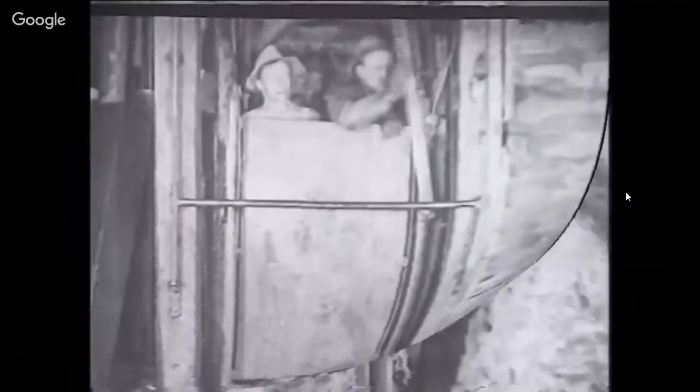Now you see these are black and whites from 1904 to 1918, mining in cobalt. The thing is, those are human beings using machines to drill and mine. Okay, so we need to make machines, or robots, that can do the mining for us. The robot that can take the machine down there and mine it for us.

Now, many people watch those Star Wars movies and were razzled and dazzled by the dark side of the Force and the supposable good side, the Jedis versus whatever we want to call them. But there's a scene where Anakin Skywalker is fighting Obi-Wan Kenobi, and they are on a planet with nothing but lava flowing around, and the machines are doing the jobs.

Okay, so we can make drones and this drone technology that can pinpoint and tell you exactly where something is. We have 3D printing machines that are 3D printing houses, 3D printing human body parts, human organs. There's no excuse for us not to make a robot machine that can go into these mines and get these things for us. We don't need child slavery, children in the Congo digging up the minerals that they're digging so we can have a piece that makes our cell phone work.

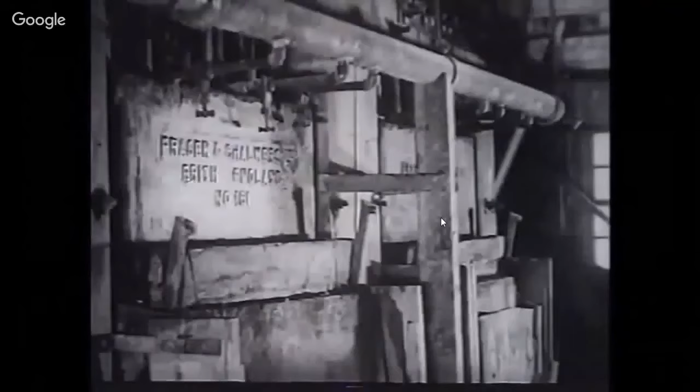The ore flows to concentrating tables, which removes coarser metallic portions, then to classifiers, and finally to the tube mills, which grind it to slime. Perfect for 3D printing.

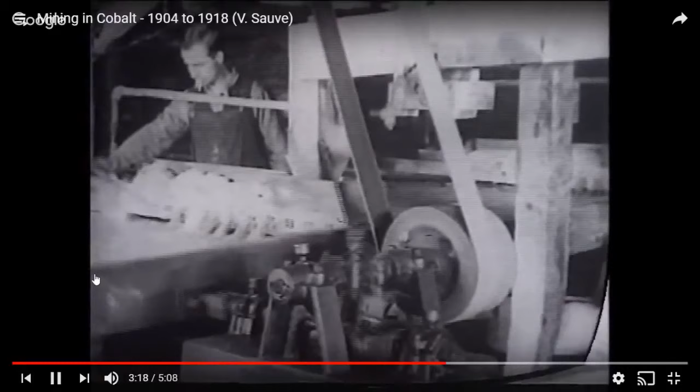No more debates, man. It's time to be men. Let's be real men. All right, let's step it up. Stop letting everybody else do stuff for us while we sit there and brag about paying for it. You could have been a real man and made it yourself.

The silver is now in solution. After further treatment to remove foreign matter, the concentrate is caught in filter presses.

Using concentrates from the presses, this concentrator mud now ready for the furnace is 90% pure silver. Everything we use that's got silver in it, there you go.

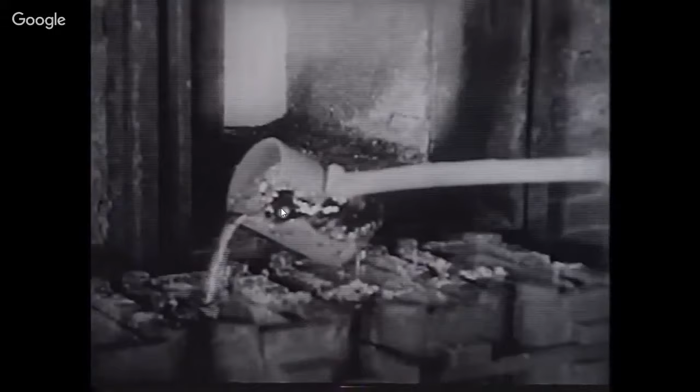After cooling, the bars are trimmed and weighed, then stored in vaults. Each bar weighs about 70 pounds. That's 70 pounds of pure refined silver.

Others, cobalts, porcupines, and Sudburies await discovery in Ontario's vast unprospected regions.

So here it is. I know most want this delivered to them in the most hip hop type of stuff, debating, and this elder said this and this elder said that. That's getting us absolutely nowhere. I no longer want to entertain it. Everyone wants to go in circles. Cool, no problem. Continue to go in your circles and sit and talk about what the Grand Master said until 2058, and the rest of the world will have moved on while you look silly.

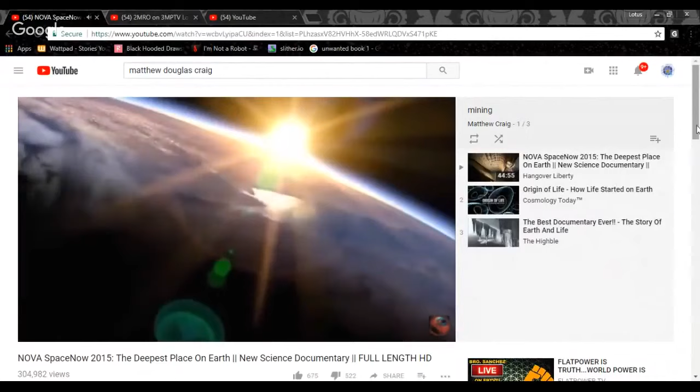Just wanted to share a little bit of this, just the intro. The Marianas Trench, the deepest point on Earth, is explored. Its sheer walls cut 7 miles into the Pacific Ocean. The mystery of what created this deep, dark chasm takes science detectives on some of the most dangerous dives ever attempted.

Deep. Now, you saw the pressure do that to the machine they sent down there. But the point is, down here in the ocean, a lot of the minerals have just been pushed up by volcanoes. We can have these machines go down there and scoop it up. Just by studying aquanauts, you can get a greater understanding of the capabilities of not just mining for the minerals pushed up by volcanoes in the bottom of these ocean floor beds, but also the healing coral reef - things that can heal us, things that can help us in our lives, just by getting down there and getting some coral reef samples and seeing how it affects us, instead of putting all these negative medicines in our body, which is tearing up the minds of our elders.

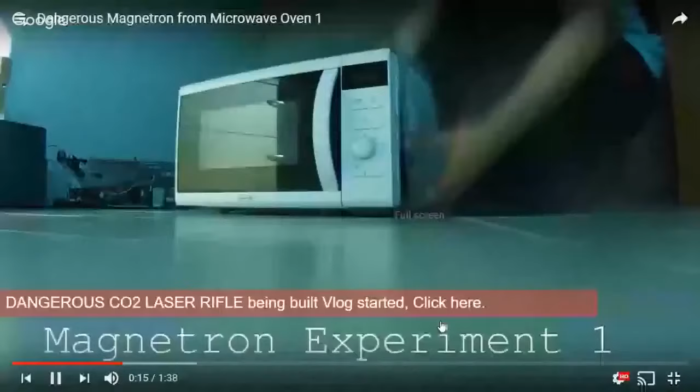We should be focused on these things - how to take a microwave apart and make things, and do things, and innovate. Look at these things, man. I don't want to see a debate, I'd rather see this. I don't want to see any more debates or comedic lectures, Kemet versus Hebrew, this or any of that stuff. I don't want to see that. Show me how a magnetron works. Show me how you make a magnetron from scratch.

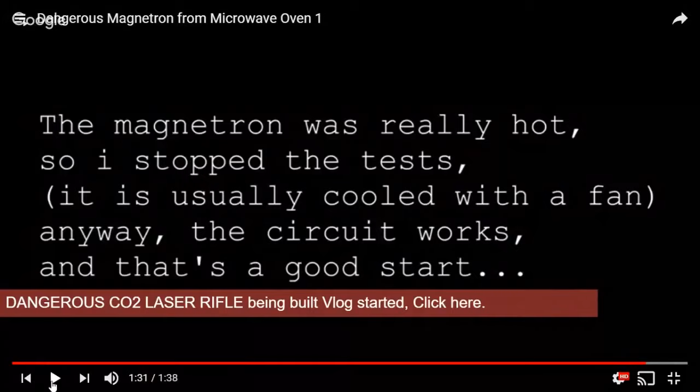This also debunks that radiation nonsense they've been telling us about microwaves. That's not what's causing that nauseated feeling if you keep your head too close - it's the mixture of what's going on with those machines. Now look at this, the magnetron was really hot, so he stops it. It's usually cooled with a fan anyway. The circuit works, and that's a good start. That means I can take a microwave apart and do whatever I want. There is no limit to the way I think. I don't have the limit of having to make it look like an ankh, or make sure it has Black Power RBG on the side, or something immediate that serves no purpose at all. I have no limit.

Down in the hole here is a spark plug, facing up towards us. On the underside there's the rest of the spark plug, and right next to it there's a needle valve with a hose coming off, running to my argon cylinder. So I can control how much argon is getting into the chamber through the needle valve, and I can get high voltage into the chamber through the spark plug. The underside of the sputter gun has a rod in here that contacts the top of the spark plug, so I have sort of a shielded entry into the chamber.

The sputter gun itself is relatively simple in construction. Let me take it apart and show what's inside, then describe how the whole process works. The very outside is called a ground shield, and it slides off like this. Its purpose is to keep the things you don't want to sputter contained inside. So when the shield is on, the only thing exposed to the chamber is the surface of this disc, which is what we want to sputter onto the microscope slide.

If we take that off, the rest of it is built like this, and between these two layers is an insulator. So we'll take this apart. There are some changes I'm going to make to this. These are nylon screws and nuts holding it all together, and nylon isn't really a great vacuum chamber material. Eventually I'm going to upgrade this, but I'm not quite sure what I'll use instead.

So this part is at the vacuum chamber case potential, let's just call that ground. The inner part here is where it touches the spark plug—this is all at a negative high voltage, let's say 1,000 volts negative. So inside here we've got a very high potential between this outer shell and the inner shell, but there are a few other tricks here that allow us to sputter just the target material and not the rest of it.

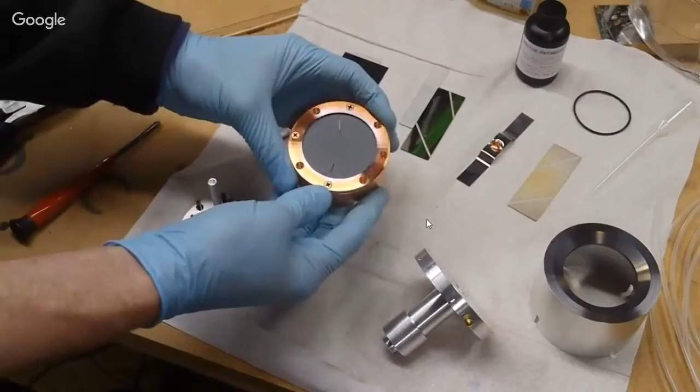Inside here is a magnet—a ring magnet, neodymium—and a steel pole piece that I turned on the lathe. The idea is that when the magnet is inserted into here like this, there's a nice magnetic field on the top. You can even see where I cracked my disc unfortunately, so I'm not going to undo the top layer just yet. But you can see there's a ring pattern where the disc has been eroded by the sputtering.

I've also got some holes in here for a cooling system, which unfortunately I didn't have running yet, hence the cracked disc. The idea would be this sort of Teflon hose—it's actually a plastic called PFA—with an O-ring on like this. The hose can be sealed up to this, and with an O-ring in the right spot, this whole thing closes up and I can pump water through the copper block.

A lot of sputtering systems say they require water cooling, and I always thought that only applied to systems that ran for 8 hours a day. I figured the thermal mass of this block would be enough to keep me safe for a 5-minute run, but as it turns out, not quite. I'm not sure if this was due to my clamping or too much power or something, but I think water cooling is kind of a necessary thing if you want to sputter at any reasonable rate.

Okay, so let me tell you how this thing actually works. If you want to make a nice uniform coating on something, say a microscope slide, you have a few options, and two of the most common ones are evaporation and sputtering. In a previous video I described the evaporation process—this entails heating up the material you want to coat... heating up the material with which you want to make the coating. Typically that's done in a metal boat like this.

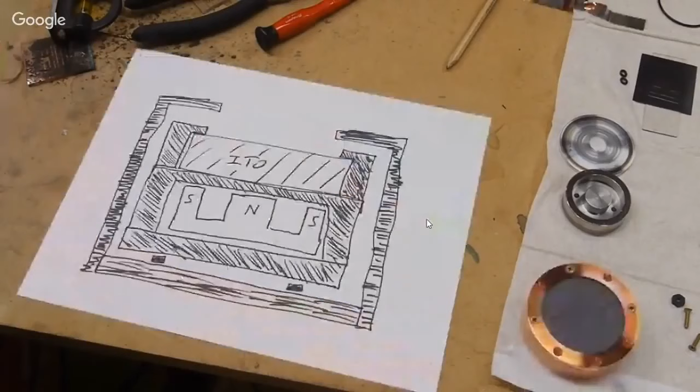Here's a cross-section view of the sputter gun. The ITO disc is the thing with which we want to make the coating. Then we've got our magnetic pole piece here with north and south poles—it doesn't matter which is which, I don't think. The idea is that the magnetic flux goes through the steel and then back up through here, so the magnetic field lines look like this.

This whole inner section here is at about negative 1,000 volts, and the outer section is at 0. So when we pump down the chamber to a very low pressure and put our 1,000-volt potential difference on here, the remaining gas molecules in the chamber will ionize, basically just like they do in a neon sign.

And the trick with the magnet is that it concentrates all of the electrons in this area. It does this because the electrons are relatively lightweight and have charge, so the moving electrons are affected by these magnetic field lines.

Now, you're hearing a lot of things here that I absolutely disagree with, but the fact is, this is something we can use in the sputtering process to create clear conductive coatings. The electrons actually spiral around the magnetic field lines, concentrating them for the coating process. However, it's not the electrons that are doing the sputtering for us—what happens is these spiraling, fast-moving electrons end up ionizing more gas molecules, and it's actually the gas molecules that are attracted to this negative charge. So what I'm showing you here is just for conductive coatings.

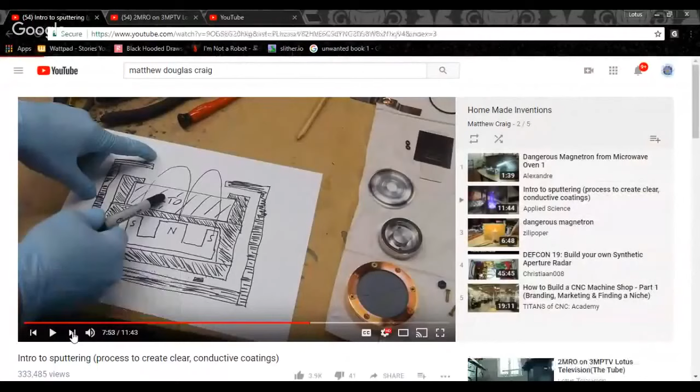This is another dangerous magnetron video. I believe I have 5 videos on here.

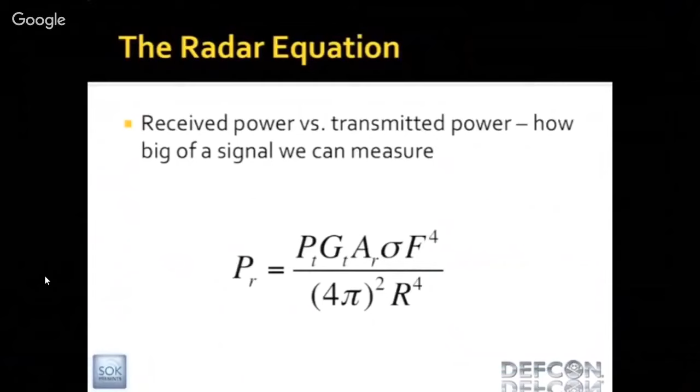All this is governed by this thing called the radar equation, which is this big thing with a whole bunch of terms. So basically what we're looking at is the function of received power versus transmitted power. And it's so interesting that a lot of this, the majority of it, almost all of it, comes my way because of the technology of diodes and magnetrons. It's very interesting - something as simple as what makes your microwave work.

I've had many conversations with many people about disagreements with the technology from NASA, and the information and data provided from NASA, being that it's never a true image. Having information like this, I kind of sat on it because I never felt it was really important to share until people started talking about things connected to flat Earth information. And when I started pulling this information, I always received challenges, not 'oh man, let me look into that.' It seems to be challenging.

Let me say this: if you think you're going to listen to this information and just run out and get some 3D printing machines and go ahead and do whatever it is, I mean it's cool, it's fine, but if you try to do it alone, it's not going to work. You're going to need a team, and it takes more than just a little bit of money.

My 3MP, Mine Manufacture Mass Produce, GoFundMe is for $1 million. It really should be for $100 million, but with just $1 million I could buy the machines to 3D print a house, submarines, planes, you name it. I could print it. All we would need to do is 3D print a facility to do it in, a 3D printed facility for 3D printers, and start making 3D printers. It changes everything.

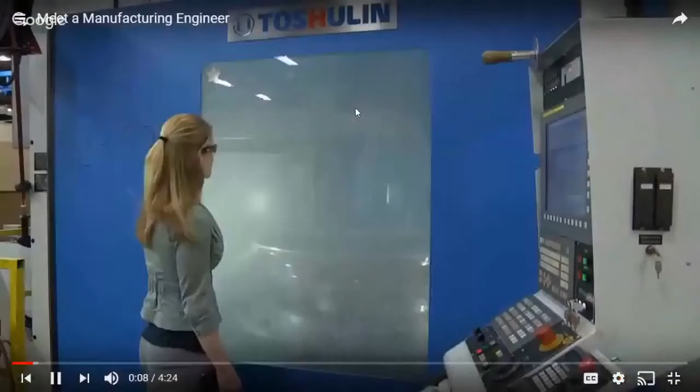I'm Becky Miller. I work at GE Aviation, and I'm a manufacturing engineer. Manufacturing is great because it lets you use your technical skills, your problem-solving skills, and your communication skills. And at the end of the day, I get to see a plane fly, and I know that I'm a part of that.

Hear that? Making something, seeing it being used, knowing you are a part of that. Do you know how good that feels? You know how good I felt working on houses and stuff, and then seeing the family going into that house. Like, wow, I helped build that whole portion over there. I helped lay the foundation for that. I helped lay the cement for their backyard. There's no better feeling that I have felt, besides making a baby or whatever.

But other than that, there's really no better feeling. And as men, I don't really see any other occupation besides being of authority, security or some type of enforcement. That's about it, any occupations we really should go for. And I know that for myself, from being in the medical field, that even in the medical field, that's not a place for a man. We really need to focus on these things, and office jobs too.

Recently had a bad experience with a company I worked with connected to Walmart. Even with that situation, now it's to the point where if you're not Mexican, or if you don't walk around acting like you're a homosexual in these jobs now, they're going to get you removed. If you go into any of these jobs and you're not acting all dainty and rolling your eyes, if you carry your posture where you don't walk around like you're getting your butt popped, man, they are trying to get you out of there.

I think the false impression that people get about manufacturing is that my job revolves strictly around machines, or that I sit at my computer all day and analyze data. My job is actually very people-oriented. I work with groups of people every day to resolve problems.

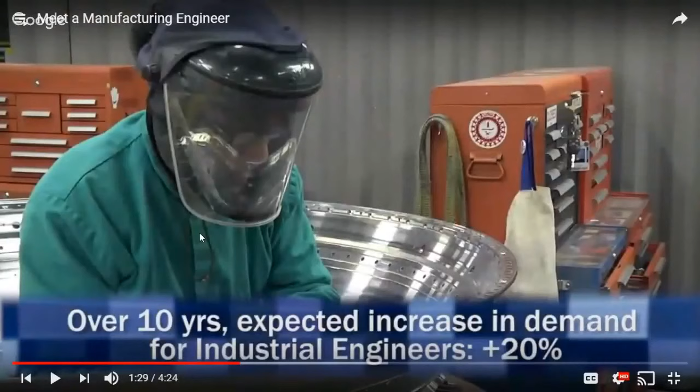Over 10 years, expected increase in demand for industrial engineers is plus 20%. That would be a 20+% increase for assembly and installation, because all the other jobs are going to be taken over by machines and robots.

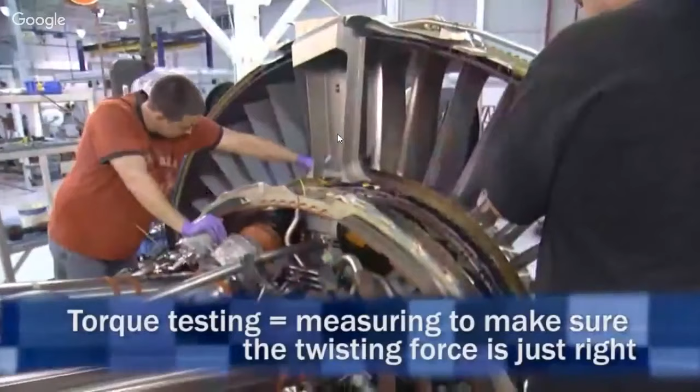Even a small part can have a huge impact on the engine. This is a nut plate that goes on our low pressure turbine cases. This little part is so important that we decided we needed to do torque testing to make sure it doesn't fail when our assemblers in North Carolina put the engine together. To get everyone to work together on a problem, I like to make sure everybody agrees that there is a problem. An operator and the methods engineer have to work together, and if they both think there's an error with our process, it's a lot easier to go tackle that issue.

I also perform product audits on our parts, checking every characteristic of our material to make sure products are conforming when they go out the door every day. This is a big part - our low pressure turbine case. It contains nozzle segments and assembly. The tolerance on the wall thickness is about 10 thousandths - so a few human hairs.

While a lot of people were watching Housewives of whatever and BET Awards and VH1, MTV this, that, and the third, a lot of the time I turned it on PBS, TLC, and watched stuff like this. I'll fall asleep watching BET or World Star fights. Even watching debate shows arguing, I'll fall asleep. But you put it on Animal Planet, Nat Geo, stuff like this, I'll get up out of my dream just so I can watch this. This is what I want to see, I don't want to see debates. You're gonna go fly to a place to go see a debate? I'd rather watch this so I can have the knowledge to make the parts to the very airplane that you're going to go fly and see.

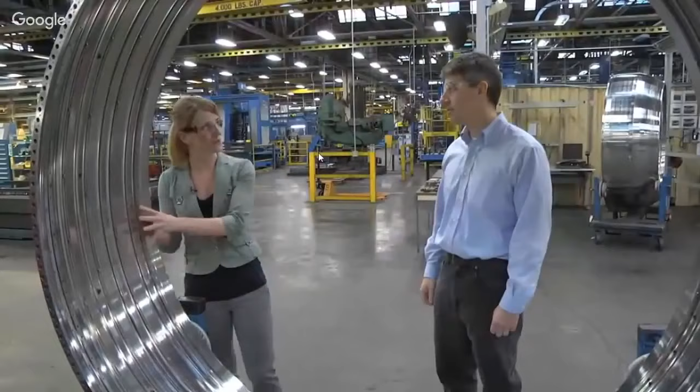I'm seeing a shiny metal surface here, but I know it doesn't begin that way. What does this part look like when it comes in? It actually comes in as a very large black forging, with a few more inches of material. It's this basic shape, but doesn't have all these features in it yet.

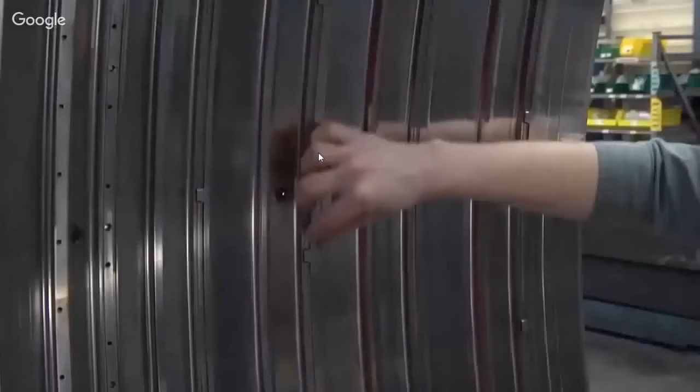What steps happen to get it to look like this? It starts in our turning processes. The turning basically makes the thickness of the case and makes all these distinct features on the inside. After all the turning is done, it goes to our milling operations, where we get our bolt holes put in, and then there's just a little bit of assembly on this part. Nozzle segments actually slide into these, and that's important because the nozzle segments are supposed to be of a certain size, and we want to make sure everything fits properly in assembly.

You are a quality engineer in the large parts area - do you like that assignment, working on the big stuff? I enjoy that our parts are so complicated because every day you see something different. We make these features on these machines every day, 2 to 3 parts a week, and you still see a challenge at every step. And at the end of the day, I get to see a plane fly, and I know that I'm a part of that.

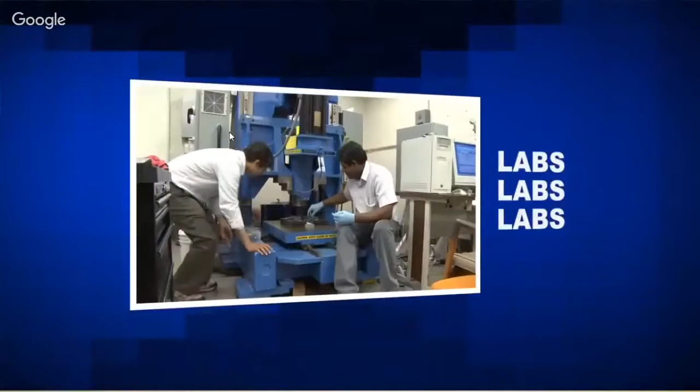Missouri S&T is Missouri's primary engineering school. In the past 5 years, we have received over $20 million in manufacturing-related research funding from public and private sources. Several state-of-the-art manufacturing laboratories have been developed or enhanced, such as facilities for friction stir welding, virtual reality, water jet cutting, composite manufacturing, direct digital manufacturing of ceramics, the Material Research Center, and the Laser-Aided Manufacturing Processes, or LAMP Lab.

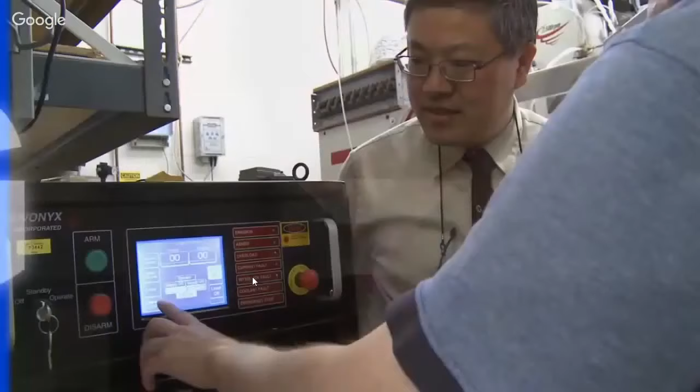These top-notch research activities have also benefited our manufacturing curriculum. As a result, the Manufacturing Engineering program is an interdisciplinary program which includes advanced manufacturing processes, shop floor management, quality control, and material processing curriculum and facilities to provide a comprehensive and practical manufacturing education. Due to its interdisciplinary nature, a wide range of courses is available, including lean manufacturing, CAD/CAM, rapid prototyping, rapid manufacturing, manufacturing management, and manufacturing automation.

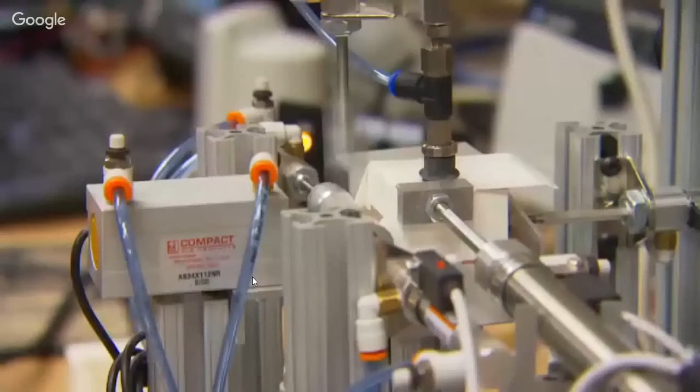With student-to-teacher ratios much lower than most universities, getting personal attention is the rule. Over 95% of our Master of Science students receive an assistantship or fellowship to conduct advanced research in manufacturing, while many students pursue co-op and internship opportunities.

In addition to traditional class offerings, our program has also successfully extended our curriculum to the world through distance learning. We offer a full master's degree program via the internet. All distance courses can be viewed at the student's convenience, live at the student's desk at work, or through archive delivery using file download. When combined with flexible scheduling, this benefits both student and employer.

Our program is the only master's degree program of its kind in Missouri and is among the first in the nation. Despite economic uncertainty, over 400 recruiters representing nearly 150 companies regularly come to Missouri S&T to recruit our graduates. S&T graduates are in high demand, with starting salaries among the highest in the nation. Employers regularly support working engineers pursuing the manufacturing degree or graduate certificates through distance education with tuition assistance.

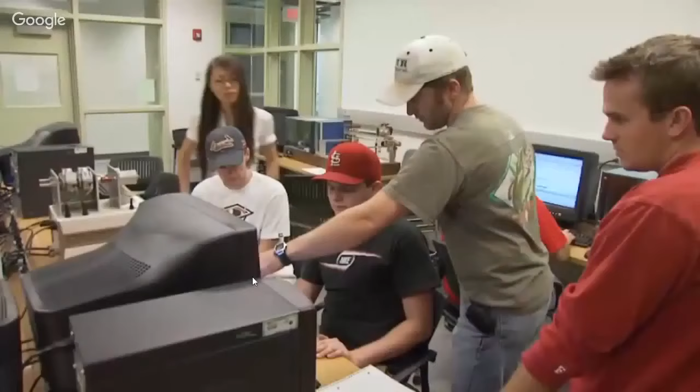Missouri S&T's manufacturing engineering program is a field that is at the center of manufacturing. It includes engineering, materials, and management. It's where the action is and requires individuals who have a well-rounded education. Manufacturing engineering at Missouri S&T. Engineering tomorrow, today.

Okay, this is how a microwave oven works, y'all.

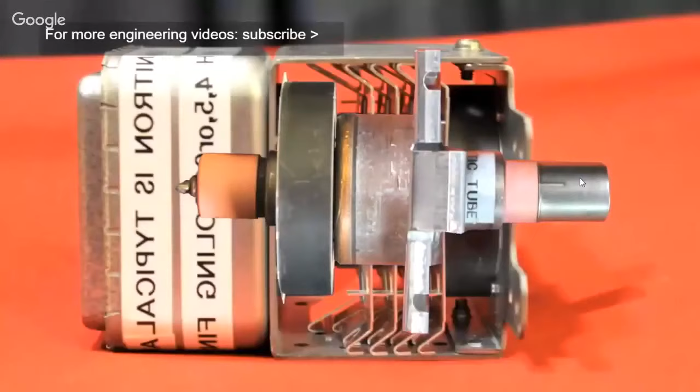This is the heart of the microwave oven, and it's called a magnetron. Essentially it consists of a vacuum chamber that contains a filament that's heated up by putting power on two wires here to a point where it will emit electrons. Around this filament is an anode which is connected to these fins, which take away the heat that doesn't get used into making power. This end here is the power output. This connects into the cavity, which is essentially the oven. The waveguide—we call the oven a cavity. So that's what the heart of a microwave oven is.

This is the power generator, very high frequency. But basically, the tube itself is simple. Here, if you cut away all the outsides—which I've done here—you see we have again the connections to this hot filament I was talking about, and the connection to take the power out.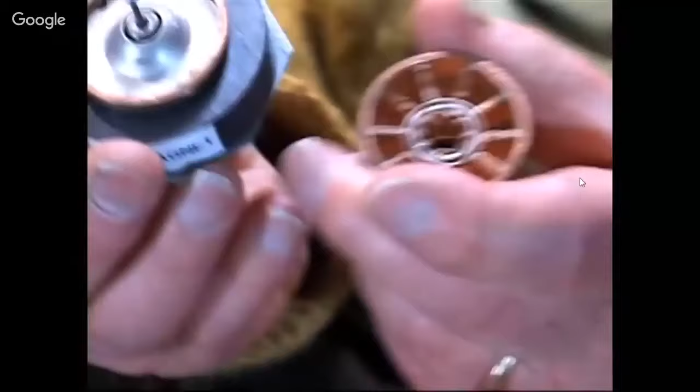So your question is, well, how does it make power? We took one of these apart, and you can see what's inside. I was telling you about a filament—this filament has broken, but there's usually a spiral of tungsten or thoriated alloy tungsten connecting between this point and this little shell here. That's the thing I was talking about getting hot.

The electrons that are emitted by that filament, when you put voltage between that filament and this anode, would ordinarily just zing right straight across and nothing would happen. But there's a magnet here—that's what this black thing is, it's a magnet. So when electrons start to move in one direction, the magnet turns them.

And depending on the voltage, it turns faster or slower. So now we've got the electrons whirling around in a circle around this filament, and they're not going over to connect to this copper anode.

Now you notice the anode isn't a solid piece of metal. It's got some vanes. These are designed to be resonant at the frequency that we want.

Resonance is like when you have a person on a swing and you want to make them go fast or higher, you push them at the right time, so each time you push, it goes faster. Instead of hitting them when they come back at you, you're going to stop them.

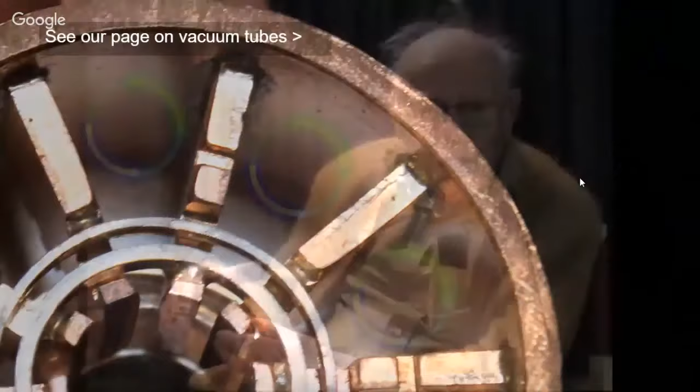Now, how do we get that power to come out to put it in an oven so we can use it? There is a cap on the end here and an insulator, and a small rod from this cap connects to one of these vanes to connect the power out.

And by mounting this, and again, like the other videos, there's things I don't agree with.

A Quiet Place is the nation's number one movie. That's to explain what they don't understand. Terrifying, you know, genius, dazzling. Yeah, you know, instead of talking about this movie, A Quiet Place, man, that's deep. I don't have any time for it. I know the family wants to talk about it. It's cool, but no more. Crowded theater, A Quiet Place. No more. Give me a loud place, a machining, a CNC. No one wants that.

Give me a handmade engine block or jet turbine. We want precision things made by machines. Machine tools built our modern world. Our lifestyle wouldn't exist without them. Now, machine tools, modern marvels.

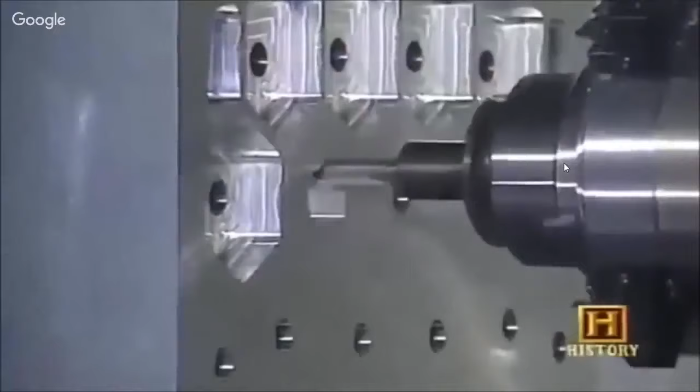Simply put, machine tools are power-driven machines of all shapes and sizes, primarily used to create metal parts. Those metal parts might be the steel mold for a plastic automobile headlight. They might be the aluminum supports for a jet airplane body. Or they might be parts to another machine tool.

Machine tools have left their legacy, cut, stamped, and shaped into the metal of every imaginable product, producing thousands of parts that go into the makeup of various items we utilize every day. If there's no machine tool, everything would have to be shaped by hand, scraped, fitted, or filed into specific shape to fit into mating parts.

All these inventions that came about in the late 19th, early 20th century might not have come about as easily as they had if it were not for machine tools.

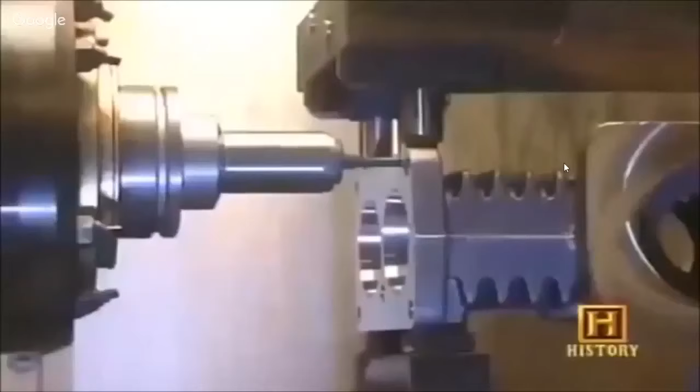Machine tools are at their core tools. If you think about a tool like a hand drill, a machine tool takes that drill's process and mechanizes it, and performs it more precisely and more efficiently than a human ever could.

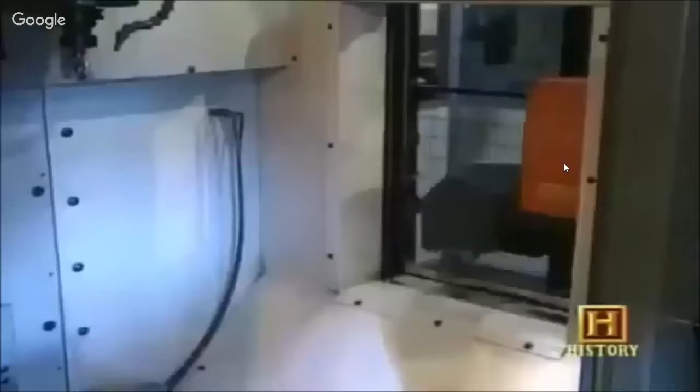The most widely used machine tools today are called machining centers. They perform a host of operations from drilling to milling to boring. A raw block of metal goes in, a finished part comes out.

One place where this began was the Cincinnati Screw and Tap Company, founded in 1884 by George Mueller and Fred Holz.

Today, the company they started is one of the world's leading machine tool manufacturers. What we do here in Cincinnati is we design, manufacture, and assemble all of our machine tools built in the United States.

This particular machine is called the U5 because it can operate on 5 sides of a part. And these days, our customers, in trying to reduce setup, want to complete a part in one operation. Hence, they want to be able to operate on all 5 sides of the part.

Typical customers of this kind of machine tool are tool and die manufacturers. The machine would come in and would actually shape the die, for example, in the shape of a door frame for a car. There are 2 Pentium microprocessors running the computer that runs this computer numerical control machine.

The computer directs all the operations of the machine tool. There might be up to 50,000 unique tool points, all blended together in one motion. You can store literally hundreds of thousands of data points in a machine like this.

Wow, man, that's what I need. This one starts at close to $1 million. Y'all could have the latest camera, the latest $80,000 car. Give me that instead. You buy that $80,000 car and it devalues. You buy that camera and it devalues. I get this and I'm a trillionaire in 30 years. That's the point of this, man.

$1 million, and that price can quickly double as features are added.

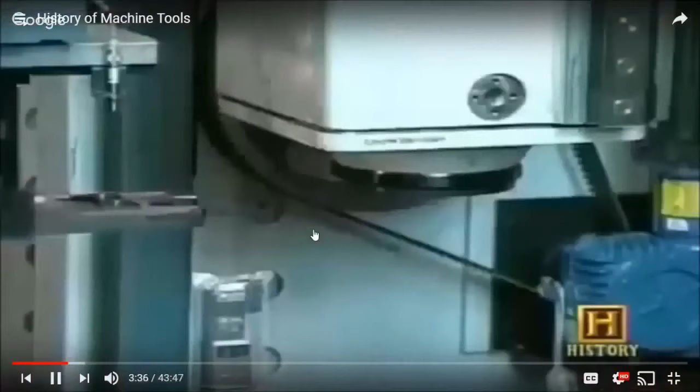Also building the machine tool business was R.K. LeBlond, which opened in Cincinnati in 1887 with just a handful of employees. Today, it's the Makino Company, one of the largest machine tool manufacturers in the world. Among other things, its tools make precision parts for the space shuttle program.

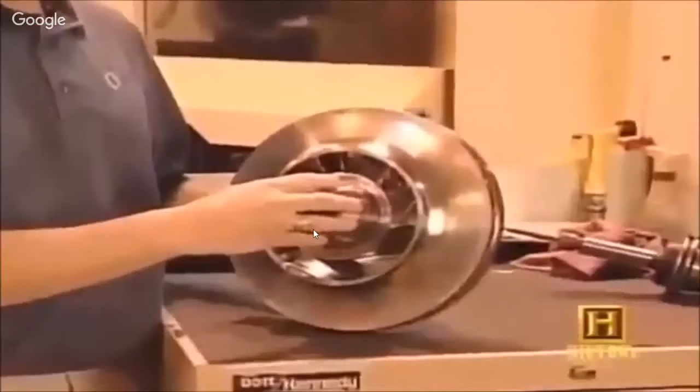This is one of the stages of an impeller for the main shuttle engine. What happens is we take 3 of these, stack them together, and together they'll generate about 76,000 horsepower running at 36,000 RPM. This is a turbo pump for the hydrogen on the main shuttle engine. It has the ability to drain an Olympic-sized swimming pool in 59 seconds.

The part is machined from a solid piece of titanium that can cost as much as $50,000. The machining center cuts it to precise, extremely complex specifications. It takes about 13 or 14 days straight just to mill this part. So this is probably as difficult as it gets.

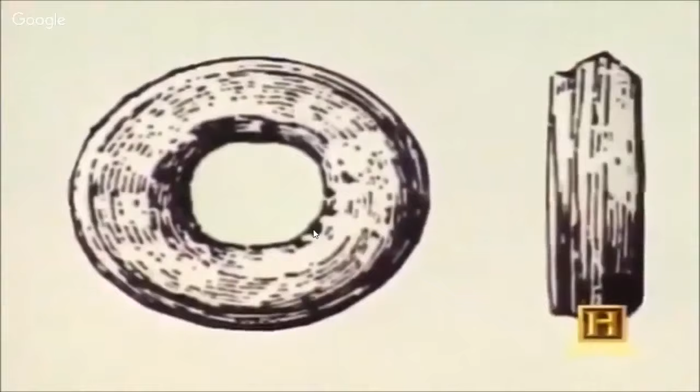Machine tools are really extensions of man's most basic tools, the human hand and the human mind. Primitive forms of machine tools have been around for thousands of years. Crude bracelets were turned as early as 100 BC by the La Tène Celts. There are drawings of sword grinders dating back to the Dark Ages. In the 1600s, sawmills and grist mills, early forms of machine tools, were built next to streams and powered by falling water. In the 1680s, Peter the Great collected simple machine tools that could decorate watches and trinkets.

But the story of modern machine tools, those strong enough to shape heavy metal, begins with the Industrial Revolution in England in the 1700s. These tools depended upon a new source of power: steam. In 1765, James Watt created a steam engine dependable enough to power a machine. His engine harnessed the up and down action of the piston and used it to turn a crankshaft, a process called rotary power. Watt's rotating crankshaft would be what powered the first modern machine tools.

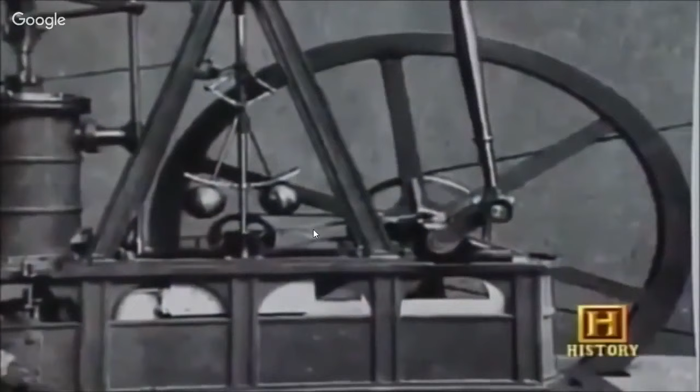The real beauty of the steam engines, at least related to the machine industry, is that you could put a steam engine anywhere. You didn't need a water source, you didn't need a mill race to operate a wheel. You could put a steam engine of any size in your factory and do machining. It was really an innovation to have a steam engine that could be hooked up almost anywhere.

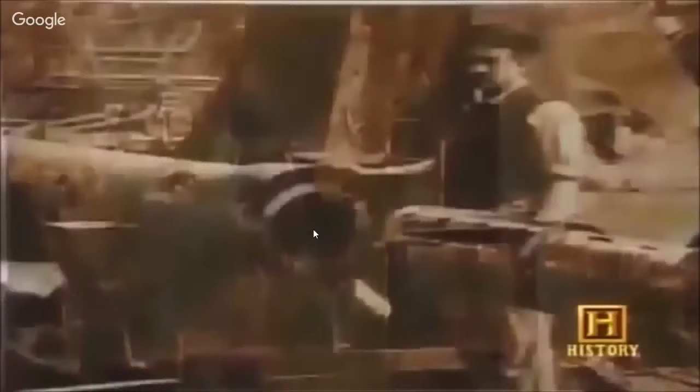Steam engines, however, were difficult to run. They took a long time to get started. They had to be well lubricated. They were loud, and unfortunately, they were quite dirty. They were surely not safe. In spite of their shortcomings, within 50 years of Watt's steam engine, all the basic modern machine tools would be invented, most of them powered by steam. Some would be adaptations of earlier woodworking tools, some would be completely new ideas.

The mid-1700s through the early 1900s would be the single greatest period of machine tool invention and design. We think that we are so far advanced today, so clever and smart, with so much technology behind us, and yet the early people that devised the first machine tools really were very bright individuals. It was a by-guess-and-by-golly type of thing that eventually produced something of value. They didn't have the college degrees that are evident today, but by golly, they had a lot of ingenuity and they used it.

Machine tools changed the world by making possible the manufacture of all kinds of goods which, prior to the Industrial Revolution, had only been within the realm of the wealthy. Suddenly, they could be produced in vast quantities at low cost.

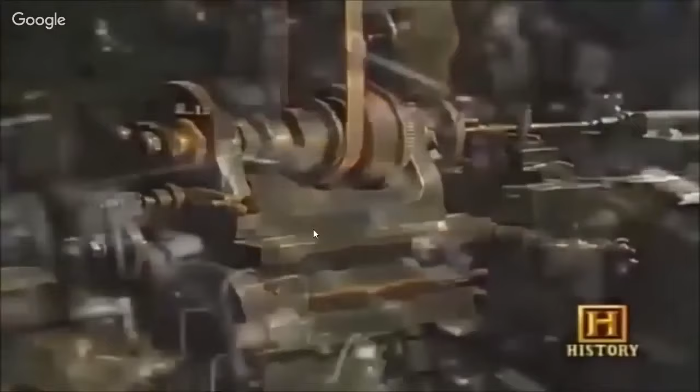The machine tools that made this possible can be broken down into 7 basic types. The earliest are the turning machines, also known as lathes and bores. The second were the planers and shapers, built to work with metal much like a carpenter's plane. Third was the most durable of all machine tools, the milling machine. Like the planer and shaper, it smooths and shapes metal parts.

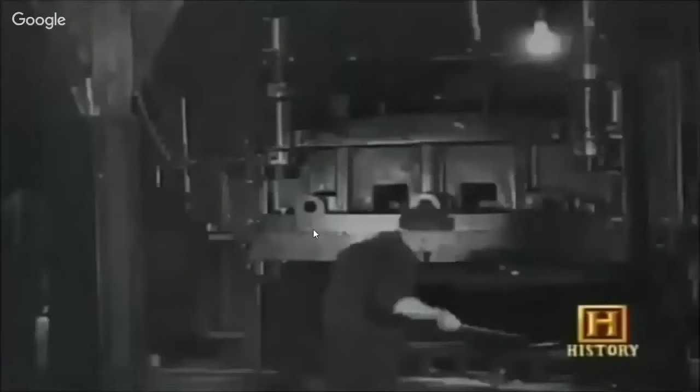4 other tools round out the 7: drilling machines, grinders, power saws, and large metal shaping tools known as punch presses. All were invented by men working with little more than intuition and a deadline. When we come back, we'll take a look at them.

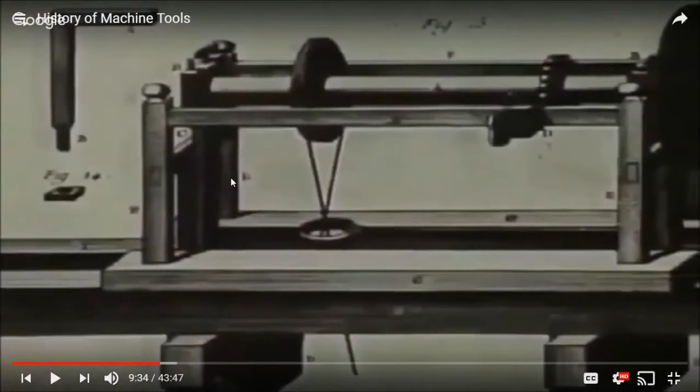There is one thing that is guaranteed after being alive - no matter what, you will die. No matter what, there's nothing you can do about it. Now, if you want to talk about some scientific advances and spirituality stuff, cool. Some scientific advances to make it to where we don't die, great. That would make existence boring. But hey, one thing is for certain - we will die.

Are we really gonna die? Because most of us in this community, and I've seen the numbers of many different channels of the age groups and which gender is at a greater percentage of watching these different social media outlets on YouTube, I find that between the age 25 and 40 is really the ages of those watching this conscious community stuff. And those 25 to 40, 75 years from now, will be dead. Okay? We will be dead.

Are we going to let another 100 years go by, and continue to go down this path? Because technology is getting better, things are getting tighter. Trying to do things illegally is going to be impossible in 2 years. Get right with this now. Get with the 5,000 elite. Deal with this now. Get on board. Hop on board. I'm saying this personally to people - even polite.

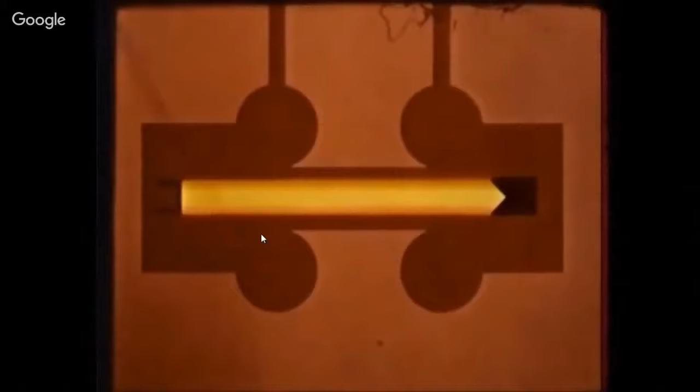The essentials of this simple klystron are the electron beam, and two metal boxes known as cavity resonators. The cavity resonators have a potential which is positive with respect to the cathode. Thus, the electrons emitted by the cathode are accelerated towards the first resonator.

Because the resonators have apertures in the form of grids, the electrons will continue until they reach the collector, which is at the same potential as the resonators. Therefore, in the region between the first resonator and the collector, the electrons would have a constant speed if it were not for the influence of the cavity resonators.

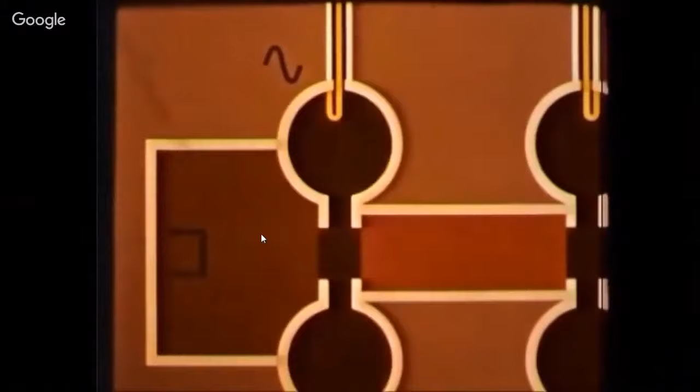In reality, the first cavity resonator is supplied with the weak high-frequency signal which is to be amplified. This signal will initiate an electromagnetic field inside the cavity. Due to this field, the velocities of the electrons passing through the first resonator are modulated. On arriving at the second resonator, the electrons will induce another electromagnetic field of the same frequency. This field is so strong that it is possible to extract a large signal from the second cavity.

To understand this amplification process, it is necessary to study the behavior of a cavity resonator in detail. There is a certain similarity between a cavity resonator and a conventional resonant circuit. A simple resonant circuit consists of a capacitor and an inductive loop.

It is known that a conductor contains free electrons. Charging the capacitor to obtain a voltage of this polarity means that many electrons are removed from the upper plate and an equal number of electrons are introduced into the lower plate. Thus, there are two charged layers. One layer has an excess of electrons and is therefore negatively charged. The other layer has a shortage of electrons, which reveals itself as a positive charge.

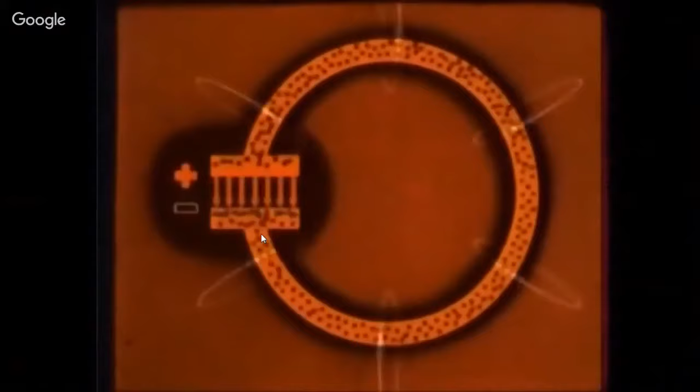The alternating current gives rise to an alternating magnetic field. The magnetic field of the loop is out of phase with the electric field of the capacitor. At the moment the magnetic field is at maximum strength, the electric field is zero. A quarter of a cycle later, when the electric field is at maximum strength, the magnetic field is zero. There are two similar situations in one cycle at which the fields have reversed direction.

All right, let's get to another part. The oscillation, which was started by loading the capacitor, represents a certain amount of energy that is continuously exchanged between the electric field and the magnetic field. The smaller the value of the capacitor and the inductivity of the loop, the higher the frequency of the oscillation, or the resonant frequency. With this simple circuit, a rather high frequency can be obtained because the inductance of a single loop is very small. To obtain higher frequencies still, the inductance can be further reduced by placing two or more loops in parallel.

Now you can see the results. This finally results in the formation of a... I'm going to go to the next video, but now that's just to show you how that works.

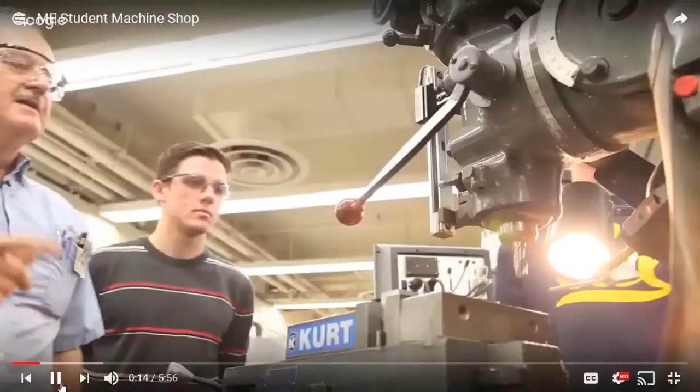Okay, 3.5 years ago, I was conducting aerodynamics research at a wind tunnel. And through that research, we were able to significantly enhance the capabilities of wings. The machine shop was integral to that process because I had to basically build and then test, build and test, build and test.

You know what, our project this semester is an automatic... You know, one thing I noticed in all these machining facilities, I don't see any brothers and sisters. We're too busy trying to be athletes, trying to be musicians, trying to sing and rap. We're too busy doing that. We're too busy working the job that we're expected to work, the job that's been picked for us. That's manifested our destinies. These jobs have been picked for us.

And sad to say, in California, in the machining business, it's going to depend upon how well you do your job. But in California, when you deal with companies dealing with warehouse or construction, you are literally at the mercy of another race of people that don't want you working there. And I'm going to call it out right now: in California, the Mexicans will make sure you are fired. As I said earlier, if you're not acting dainty like a homosexual male or effeminate male, if you don't come in here acting like a metrosexual, and you're a man, and everything about you is a man, you are going to have issues at that company.

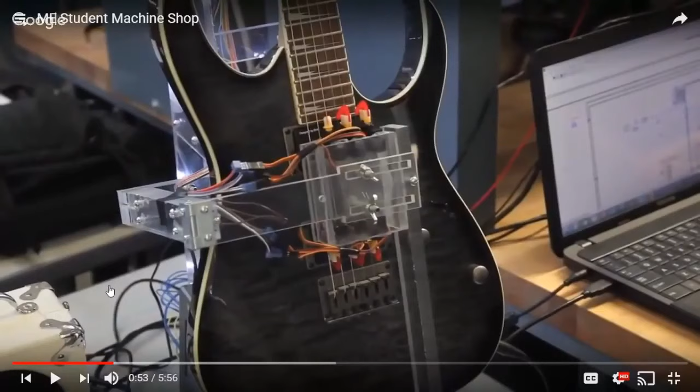I respect what this female is doing more than what Reggie and Jabari and all of them are talking about on HOK right now, but that's a small side of it. I'm talking about what's talked about on Oprah Winfrey Network - she should have nothing but this. Nothing but this, no MTV, BET, and all this other stuff.

Here goes the upliftment. Children from the age of 3 to 7, as a little boy, when they see something shiny, they want to touch it, they want to feel it, they want to know how it works. Start teaching at that age.

Start giving our 3 to 7-year-olds the tools and the mind to use their hands to build, to want to use 3D printing machines, to want to assemble and install. The future jobs are going to be in assemblage and installments.

That's it. There's a change coming, and this is not a prophecy - these are laws that are being passed right now on C-SPAN 1, 2, 3, 4, and as many C-SPANs as there are. We're not paying attention to the things that we should; instead we're getting caught up on many things that are just distractions. So I'm here to keep us on track - that's what I'm here for.

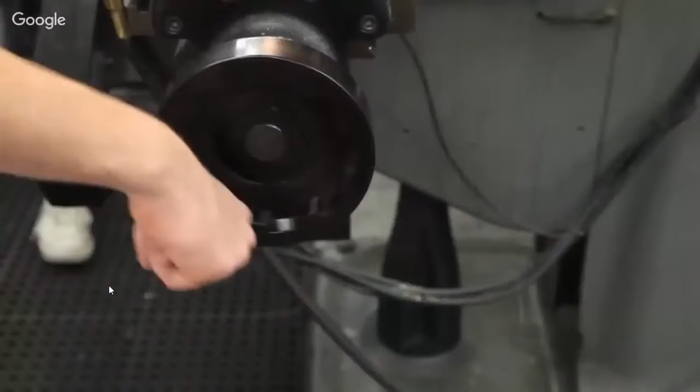The bulk of the creativity for these things comes from the engineering innovations that occur because of people having exposure to places like the machine shop, where they can see this sandbox of creative capability. Learning by doing is probably one of the most essential experiences you're going to get in here - combining the theoretical that you learn in the classroom with the practical of how it's done out in industry.

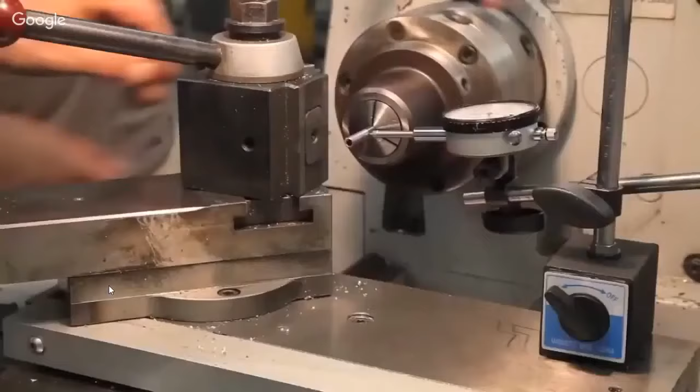It's easy in your CAD program to make everything with five decimal places of tolerance, but for them to actually go into the shop and try to meet that standard gives them a whole new appreciation for the physical reality of it. There are parts that I had to machine within a 0.5 to 1,000th precision. There's no real way to calculate that — it comes down to a lot of touching, feeling, and experience. You become immersed in it.

I need to show you this video. It's a very important video.

Something that blew my mind, because I would listen to people talk about these things, and they really don't know what they're talking about.

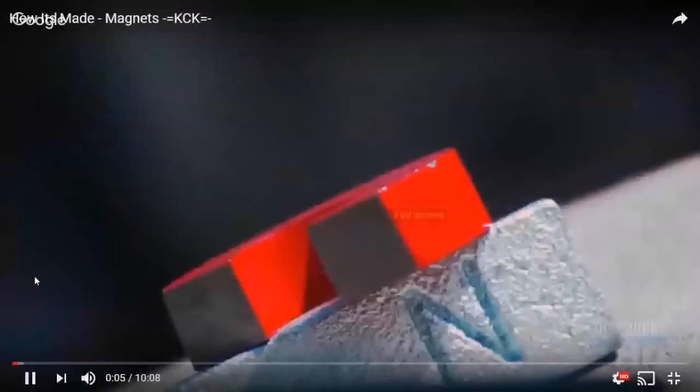They help run motors and generators, among other things. Magnets occur in nature, but two centuries ago people figured out how to make them using electricity. Now they say magnets work in nature — yeah, but in what way? Is there something natural about it? Like I could walk past a piece of rock, and whatever metal I have is going to fly to that rock. Is it natural? There's something they're not telling us about it, but they're going to show you here that magnets are not quite what we thought they were. They are the key working parts to many important machines we use today.

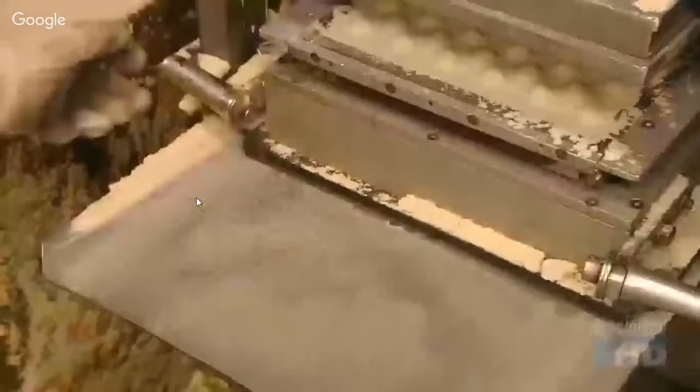You can't see or feel the force causing this globe to levitate, but it's not magic, it's magnetic. To make magnets, they must first create a sand mold of the magnet shapes. They load this pattern of four magnet shapes into a machine that fills it with sand. They remove the pattern and smooth the surface, dimpled by the machine's lid.

Then it's back inside, but this time the machine pumps in gases to chemically harden the sand. It takes just seconds to solidify. They lift out the sand slab, revealing the impression of the magnet pattern — it's now a mold. Magnets come in many shapes and sizes, as do their molds.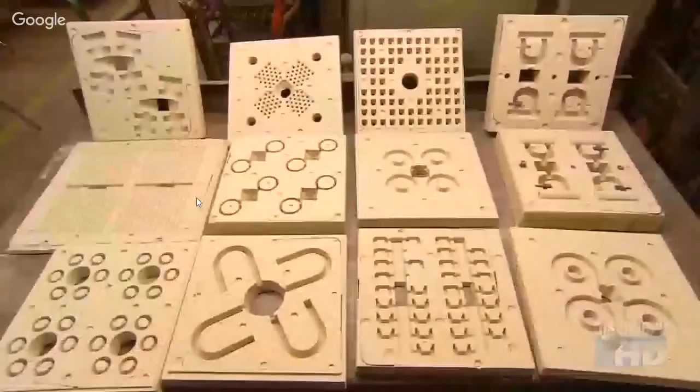Now they're ready to mold the magnet shapes. They take copper, cobalt, sulfur, nickel, pure iron, aluminum, and titanium. See how many different minerals it takes to make a magnet? Are you telling me there's a rock made up of all that stuff that if I walk past, I'm going to fly to it because of metals?

I'm telling you, and even with that stuff they're saying about electrons, those aren't electrons. But this is not about that — that's why we need to get a hold of these things and start doing it ourselves, so we can explain it from experience, because a lot of the philosophies tied to these things are lies. But you know what's real about it? The fact that they can take those minerals, put them all together, and do this.

They load all these metals into an electrical induction furnace. It generates a pulsating electromagnetic field that heats to more than 1600 degrees Celsius, melting everything into a molten soup.

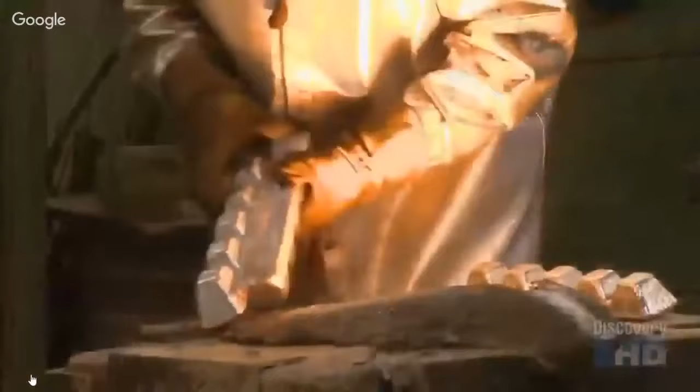See that? Now me, I love doing this. They pour it into the sand molds. The molds burst into flames because the gases that harden the sand are highly flammable.

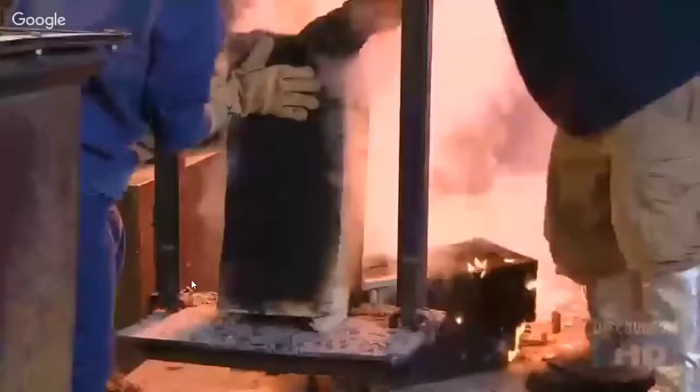They slide the blazing molds to another part of the foundry and knock them to the floor. Then they bust them open with a sledgehammer to get air inside so they cool down and the gases burn off.

They shovel everything into a bin and sort the metal shapes from the sand chunks using, what else, a magnet. The molded pieces react like ordinary metal — they don't yet have magnetic power.

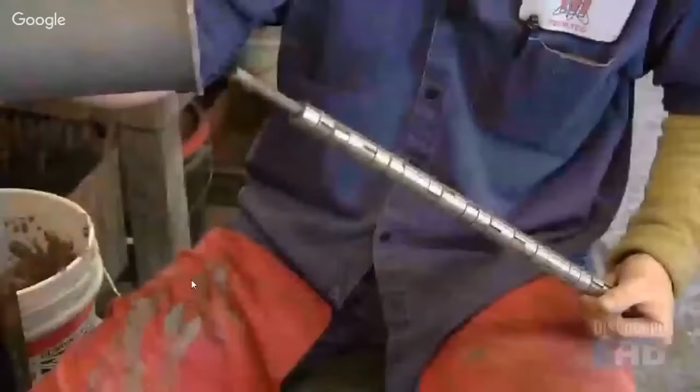Some are shaped like rings. Threaded onto a copper pipe, they'll be used in electric motors. They place the ring-covered pipe in a much larger tube, then center it by packing silica sand tightly around it. The sand will hold the rings in position during the next step.

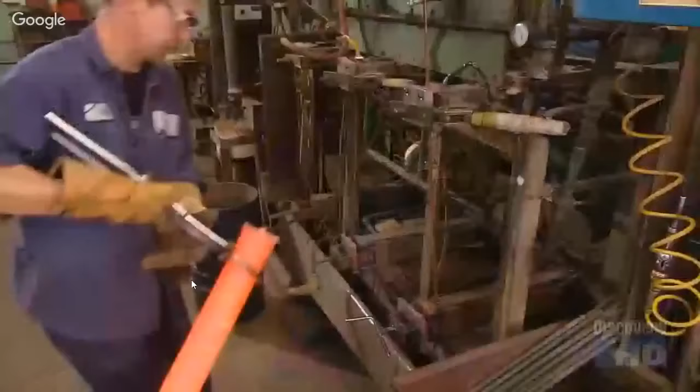They seal both ends with concrete, allowing the inner copper tube to protrude slightly. Then it's into another electrical furnace, which heats the tube full of magnet shapes until it's red hot. This primes them to accept an electromagnetic field, delivered by a metal rod. They slide it down the center of the copper pipe and clamp it in place.

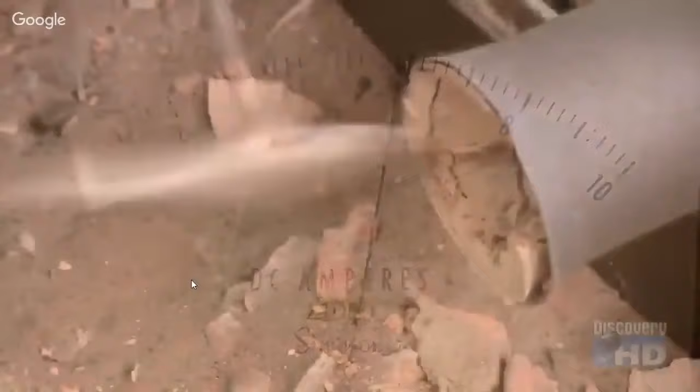Water keeps the pipe from melting as they deliver a low voltage, high current charge in a cylindrical formation, important for motor magnets. They break open the seal. The process has left the ring shapes mildly magnetized, but most importantly, it's oriented the magnetic field properly. They grind away any rough edges.

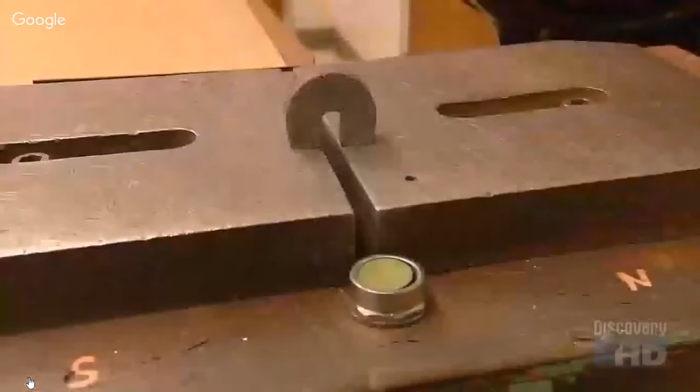At this point, all magnets are pretty useless. But this machine will empower them. It delivers an electromagnetic charge to the metal, which magnetizes it. It's so funny, one would think they knew something about magnets. We've been using them since kids in preschool and kindergarten, but turns out it's not quite what those textbooks told us. The establishment of that weak magnetic field earlier has laid the groundwork for this moment, ensuring that the magnetization is properly oriented. That's how it's polarized. It's electrically charged now. Some serious magnetic muscle.

In their various forms, magnets continue to exert a lot of pull in our society because their invisible power helps keep so many things running.

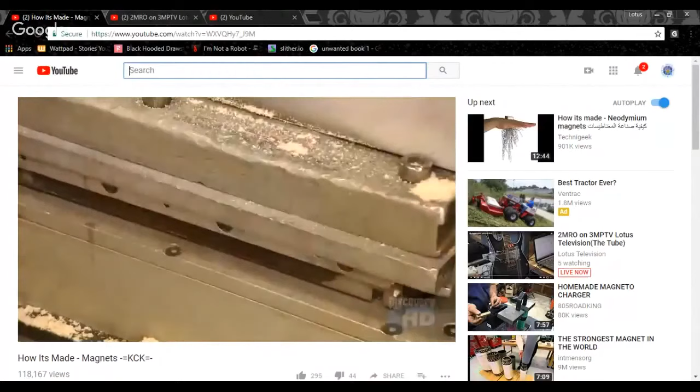Before we close out, it's something that's connected to magnets that I'm going to show you now.

Trying to find a decent one. Oh come on, you know. See, you can make homemade ones, but I'm trying to find the one that's in the actual shop. I see one already.

And of course, when it comes to free energy, you see Tesla's name popping up. But okay, let me get to this one video.

So we can have 3D printers print solar panels that give us energy. Also 3D print all the things needed to make free energy. And it just so happens, magnets is a key component to this. There's another video that shows even more. It actually shows a machine. All right, come on.

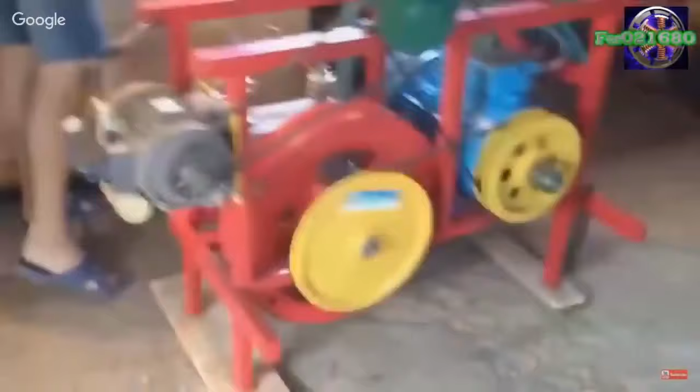Look, and that's all you have to do to get it started. That's it. Get a machine to do it, you just need to push this push-up button. Now I don't want us to be like the movie WALL-E where everyone gets fat because everything's so simple. But with all the extra time we have from everything we spend all this money and work so hard to have, it'll just be so much cheaper to have, so much more reliable, and so much faster that, hey,

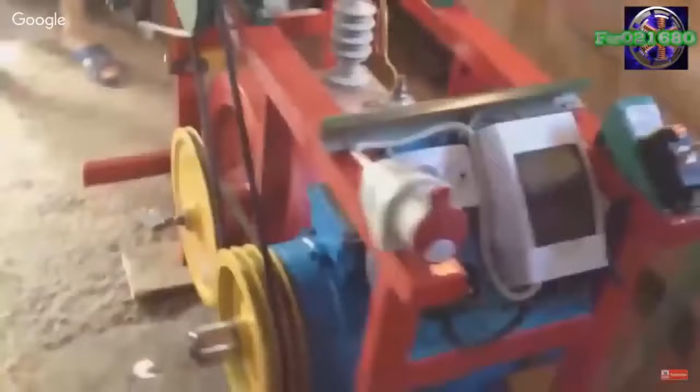Let's get it. Let's do it. Let's do it now. We should have a 3D printing machine, a free energy machine at our disposal. More debates? Well, if we're going to debate, let's see who can make the best free energy device. Let's see who can make the best 3D printer.

If we want to debate so much, to show how at odds and disenfranchised and uncooperative and discombobulated we are by debating about things in a land that we don't even live in, don't even acknowledge the people that are from there. Let's talk about these things. Let's make this happen.

See that? Cut your power off, can't debate on camera no more, YouTube. Wi-Fi ain't gonna work. Free energy. Look at that.

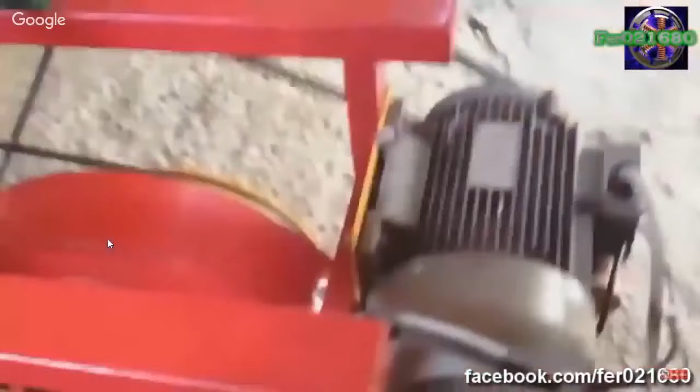All right. All right.